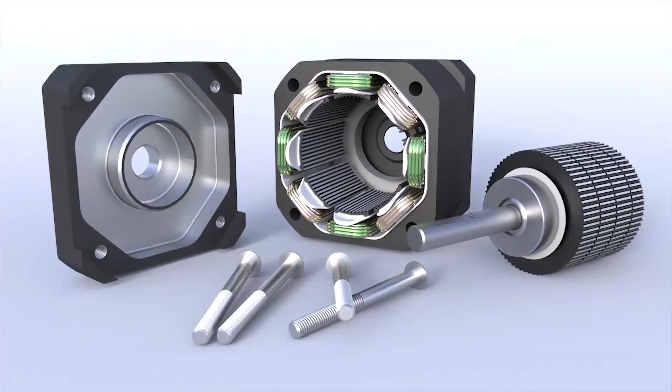The question who actually invented the stepper motor is still open to some debate, partly because original versions were not immediately known as stepper motors. However, for most engineers, ourselves included, it is largely attributed to Frank W. Woods, who patented a motor based on 5 stator coils which could be charged in various combinations to deliver step-by-step movement. There are 3 main types of stepper motors.

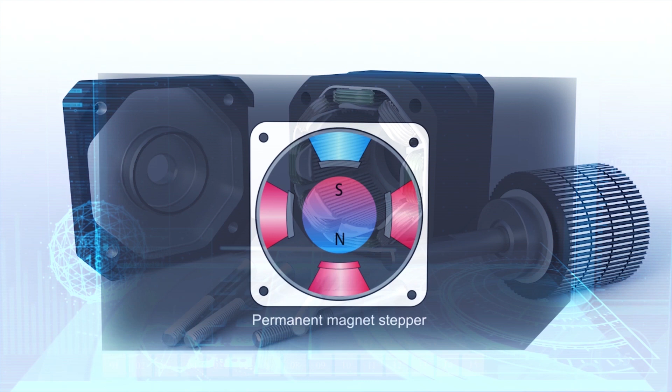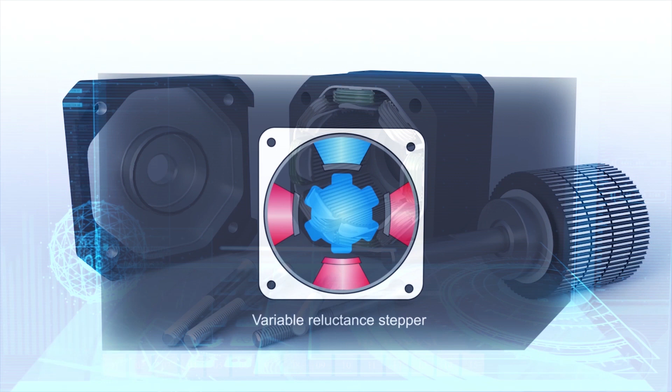Permanent magnet stepper. Permanent magnet motors use a permanent magnet (PM) in the rotor and operate on the attraction or repulsion between the rotor permanent magnet and the stator electromagnets. Variable reluctance stepper. This stepper motor uses a non-magnetized soft iron rotor. The rotor has teeth that are offset from the stator, and as we activate the windings in one particular order, the rotor moves respectively so that it has minimum gap between the stator and the teeth of the rotor.

The third type is the most commonly used, hybrid synchronous stepper motor. It is the combination of the previous 2 steppers. It has a permanent magnet toothed rotor and also has a toothed stator. To show the basic parts of a stepper motor, we will be using the most commonly used model of hybrid synchronous stepper motor. Basic parts of a hybrid step motor are stator, rotor, bearing, and shaft.

Stator has magnetic poles with small teeth. Each pole has a winding. Each winding is connected to the winding of the opposite pole so that both poles are magnetized in the same polarity when current is sent through the pair of windings. Pairs of windings are shown in the same color. Running a current through a given winding magnetizes the opposing pair of poles in the same polarity, i.e. north or south. The opposing pair of poles form one phase.

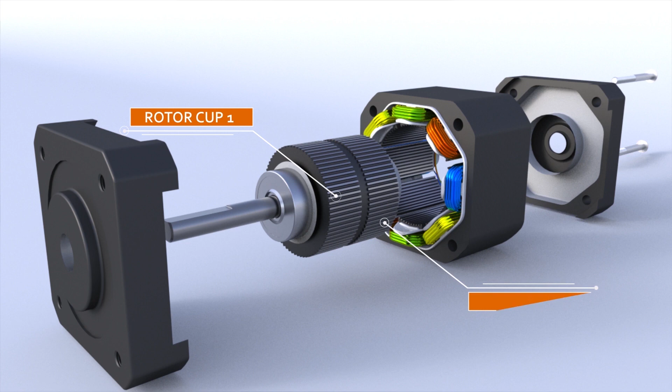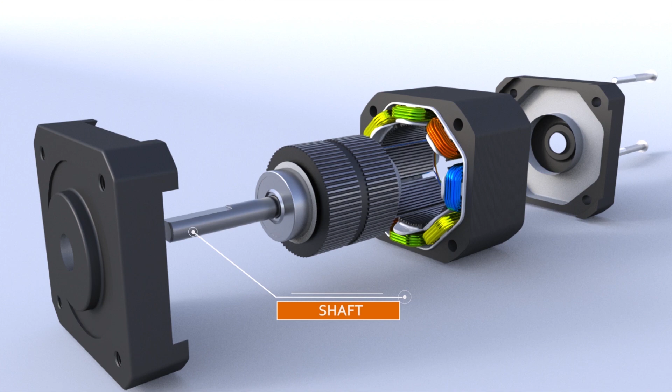Rotor. Rotor is made up of 3 components: rotor cup 1, rotor cup 2, and permanent magnet. The rotor is magnetized in the axial direction so that, for example, if rotor cup 1 is polarized north, rotor cup 2 will be polarized south. Bearing allows the shaft to rotate when rotor is turned. Shaft is attached to rotor and provides rotational drive for the load. Hybrid stepper motors can be made with a single or double shaft.

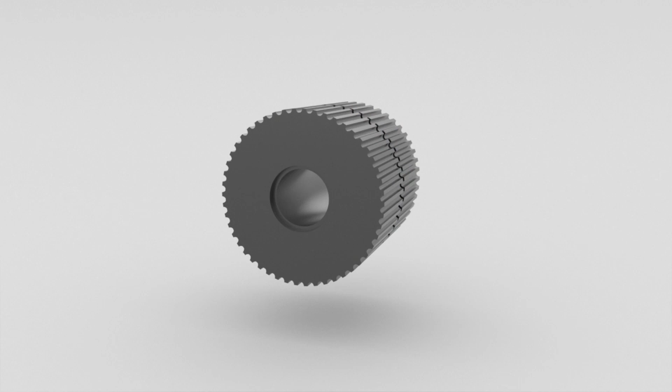Working principle of stepper motor will be explained with a 2-phase hybrid step motor which has 8 poles. With these motors you can achieve very small step angle. Let's learn the working principle and explore the functionality of a typical 1.8 degree step-sized hybrid motor. The hybrid motor has a magnetized rotor with 2 steel caps, so one end of the rotor becomes the north pole and the other end becomes the south pole. The accuracy of this motor lies in the clever arrangement of the rotor and stator teeth. So firstly, let's see and understand it.

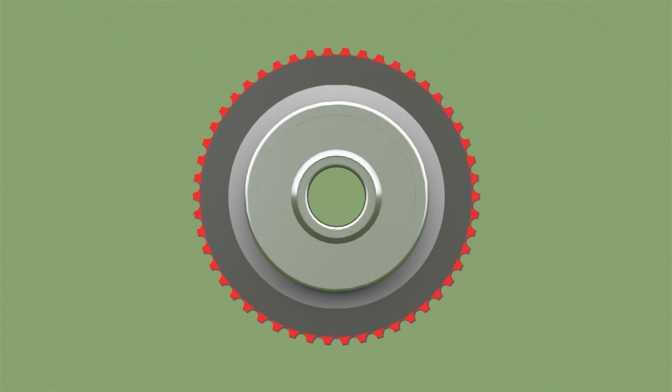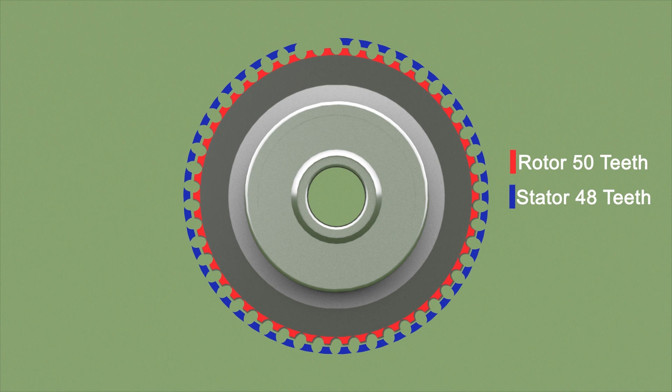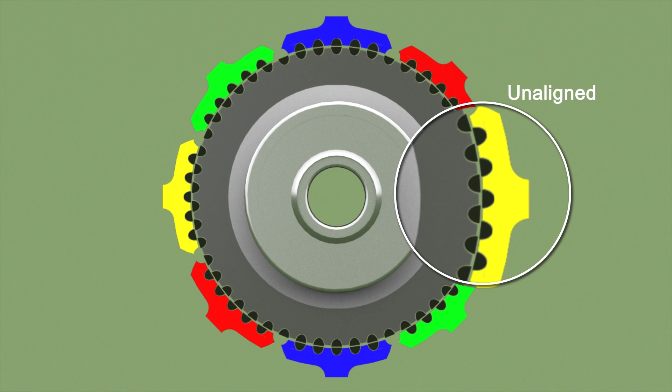Rotor has 50 teeth. To understand the stator teeth arrangement, we must first assume that the stator has 50 teeth as well. But stator actually has 2 fewer teeth than the rotor, so stator has 48 teeth. Now, let's arrange the 48 teeth into 4 group pairs like we showed in the video. Green group of teeth is half aligned with the rotor. Teeth of yellow group are not aligned with the teeth of rotor. Teeth of red group are half aligned with the teeth of the rotor, and blue group are completely aligned with the teeth of the rotor.

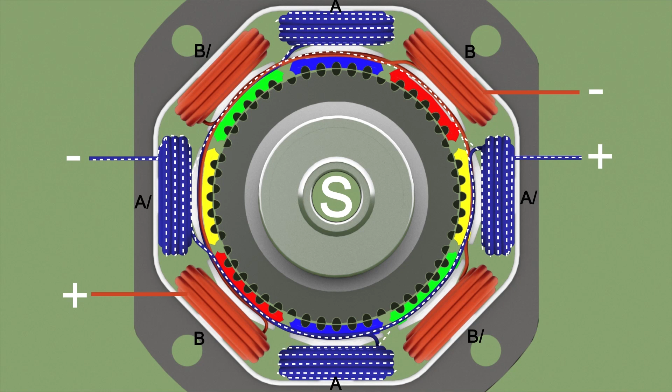Part of the rotor which is facing you acts like the south pole. The stator coils are connected as shown in the video. As we can see, we have 2 independent coil groups. When group A is energized, blue stator windings are magnetized as shown. One pair of stator poles become north pole and the other becomes south pole. We know through history that opposite poles attract, so they will be aligned, and the same polarity poles are not aligned. When coil B is energized, you can see what happens to the rotor.

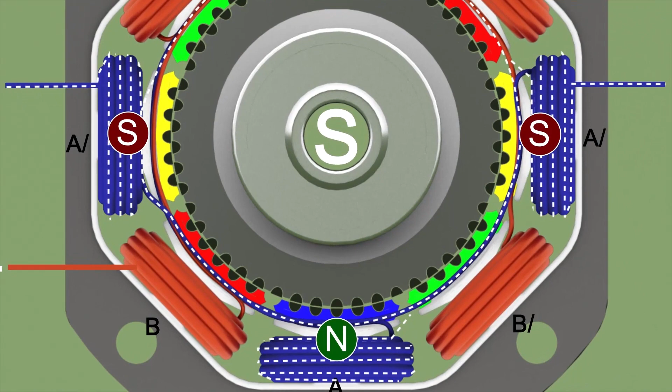The rotor is rotating by a small angle in order to align with the new north pole. It is clear that this angle is 1/4 of the angular pitch, so rotor is rotated by 1.8 degrees. Now we again energize set A with the opposite polarity. Again, the rotor is rotating 1.8 degrees. So when we repeat this process, we can achieve highly accurate motion of the motor.

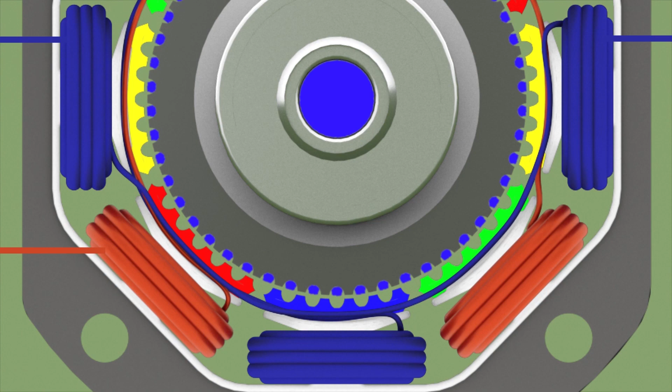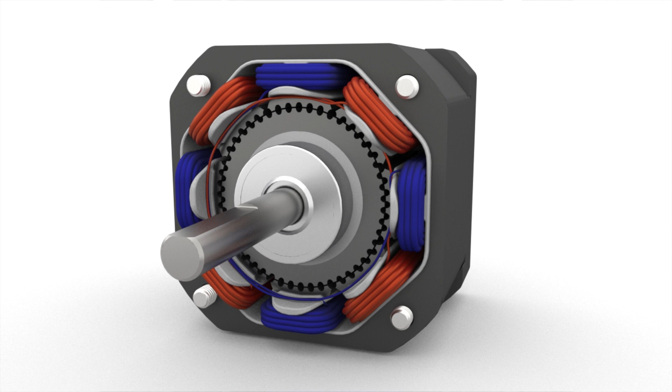Step angle rotation can be improved by half stepping. It is important to know that north rotor cup teeth are placed between the south rotor cup teeth. In this way, alignment of the opposite polarity poles is guaranteed again. So, this is the working principle of hybrid stepper motors. These are ideal for applications when precise movements and simple controls are needed.

Vibration of the step motor is one problem that we must deal with. Vibration can cause problems, especially at low speeds. So, when a stepper motor makes a move from one step to the next, the rotor doesn't immediately stop. Rotor actually passes the final position, then is drawn back, passes the final position in the opposite direction and continues to move back and forth until it finally comes to a rest. We call this ringing, and it occurs at every single step the motor takes.

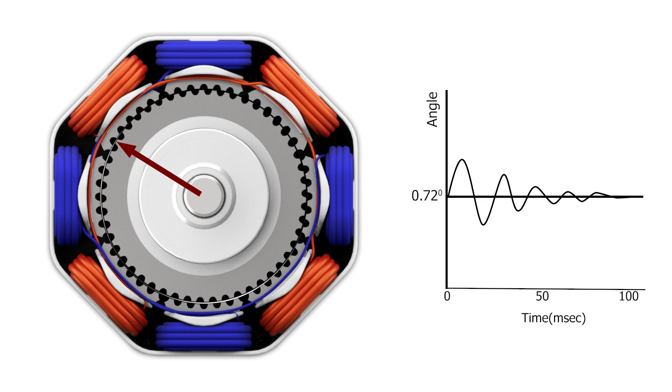Similar to a bungee cord, the momentum carries the rotor past its stop point, then bounces back and forth until finally coming to rest. In most cases, however, the motor is commanded to move to the next step before it comes to a rest. Working principle of variable reluctance stepper and permanent magnet will be shown to see differences and similarities with hybrid step motor.

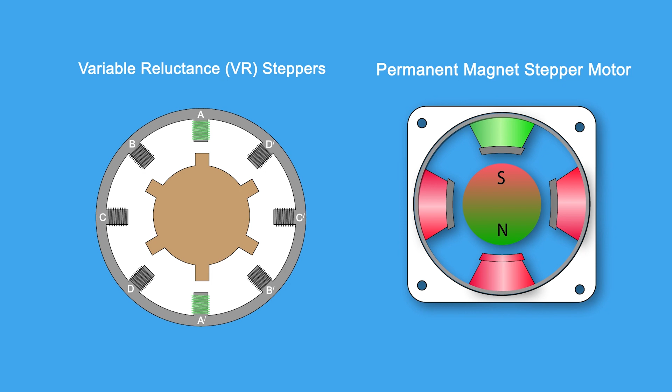Variable reluctance stepper, VR: as illustrated in the video, only one pair of teeth is aligned with the windings at any time. When the controller energizes a second pair of windings, the rotor turns so that a different pair of teeth will be aligned. Because the teeth aren't magnetized, it doesn't matter whether the winding behaves as a north pole or a south pole. The controller has delivered current to the B and B' windings, and the rotor has aligned itself accordingly. Now, the C and C' windings are energized.

The C and C' windings attract the nearest pair of teeth, which moves the rotor 15 degrees clockwise. However, there's a problem. The torque of the VR stepper is so low that it can't turn significant load. For this reason, VR steppers are not commonly found in practical systems. In fact, I've only ever seen a handful of VR motors for sale.

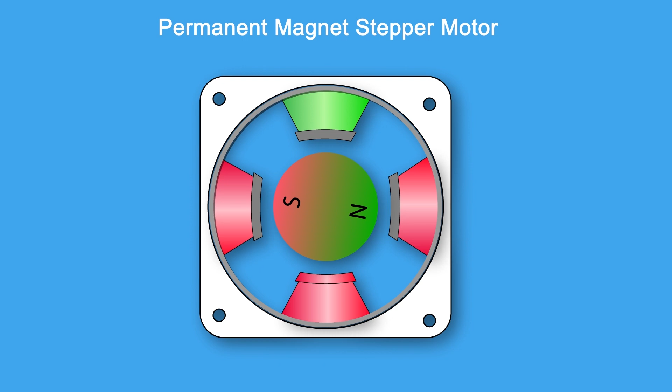Permanent magnet stepper has a permanent magnet rotor, which is driven by the stator windings. Stator windings create opposite polarity poles compared to the pole of the rotor, and the result is the movement of the rotor. A stepper motor is a polyphase AC synchronous motor, and it is ideally driven by sinusoidal current. There are 4 commonly used excitation modes for stepper motors: wave drive, full step, half step, and microstepping. These excitation modes have an effect on both the running properties and the torque that the motor delivers.

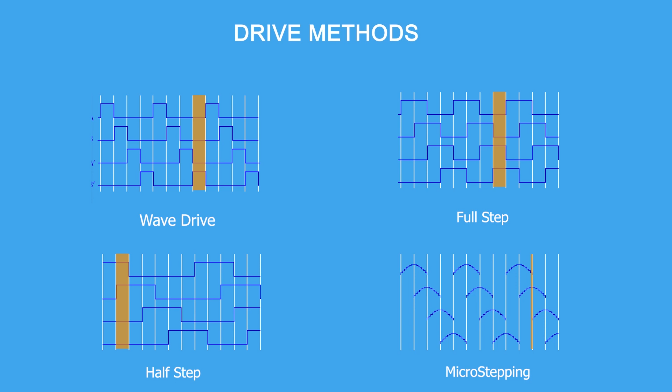The wave drive method has been simplified to better illustrate the theory. In the illustration, each 90-degree turn is representing 1.8 degree of rotor rotation in an actual motor. In the wave drive method, also called the one-phase on method, only one phase is turned on at a time. When we energize the A phase, a south pole, it attracts the north pole of the rotor. We turn off A and turn on B. The rotor rotates 90 degrees, 1.8 degree of rotor rotation in an actual motor, and so on. Each time, only one phase is energized. The wave drive has a 4-step electrical sequence to rotate the motor.

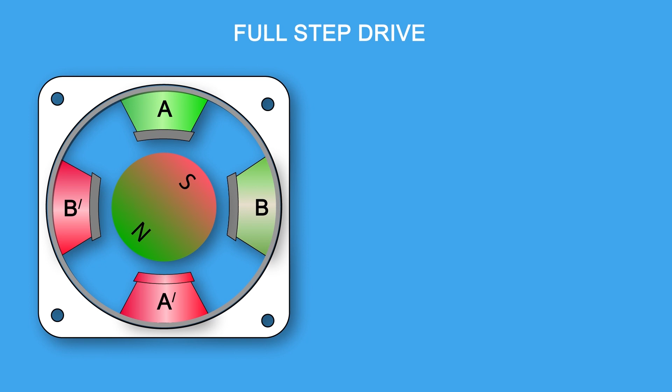Full step drive. Once again, in the illustration below, every 90 degrees represents 1.8 degree rotation in an actual motor. If both phases A and B are energized as south poles, the north pole of the rotor will be equally attracted to both poles and line up directly in the middle. In sequence, as the phases are energized, the rotor will rotate to line up between the 2 energized poles.

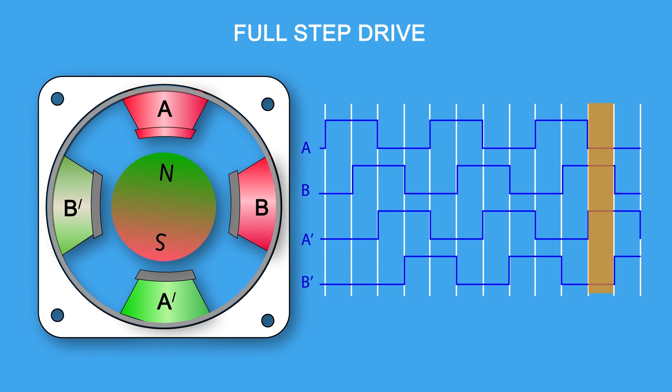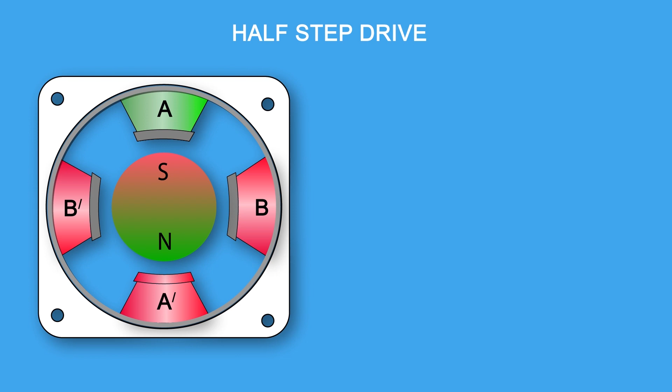Half-step drive. Half-step combines the 2 previous methods. In this case, we energize the A phase. The rotor lines up. At this point, we keep the A phase on and energize the B phase. Now, the rotor is equally attracted to both and lines up in the middle. The rotor has rotated 45 degrees, 0.9 of rotor rotation in an actual motor. Now we turn off phase A but leave on phase B. The motor makes another step, and so on and so forth. By alternating between one phase and two phases on, we have cut the step angle in half. Remember that with a smaller step angle, the vibration is reduced.

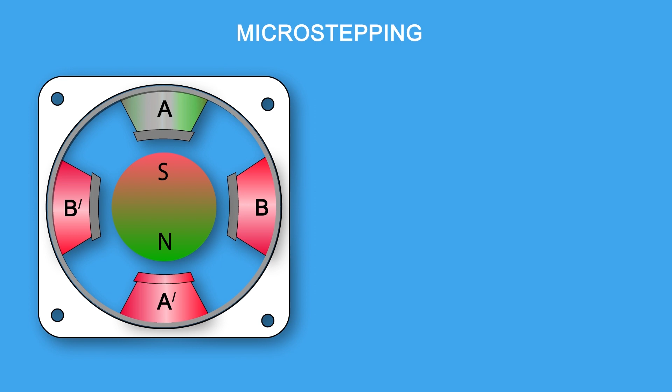Microstepping. Microstepping is a way to make small steps even smaller. The smaller the step, the higher the resolution and the better the vibration characteristics. In microstepping, a phase is not fully on or fully off, it's partially on. Sine waves are applied to both phase A and phase B, 90 degrees apart, 72 in a 5-phase stepper motor. When the maximum power is in phase A, phase B is at 0. The rotor will line up with phase A. As the current to phase A decreases, it is increasing to phase B. The rotor will take tiny steps towards phase B until phase B is at its max and phase A is at 0. The process continues around the other phases and we now have microstepping.

There are some problems associated with microstepping, mostly accuracy and torque. Because the phases are only partially energized, the motor torque is reduced, usually by about 30%. Also, because the torque differential between steps is so small, the motor sometimes cannot overcome the load. In those cases, the motor may be commanded to move 10 steps before it actually starts to move.

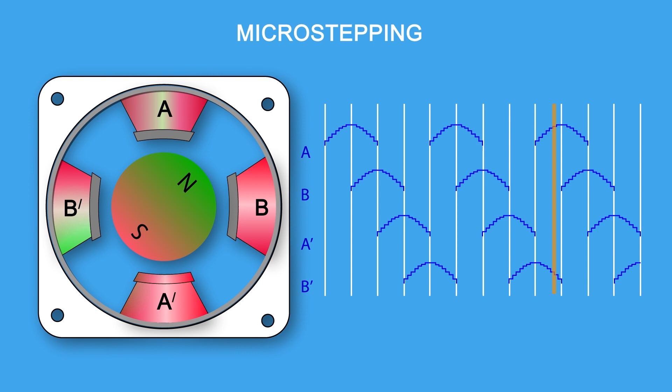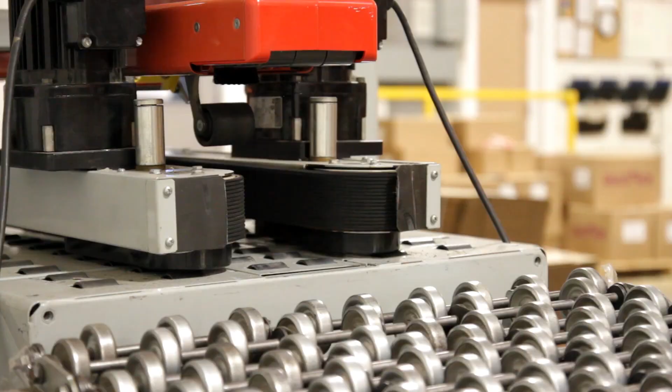Computer-controlled stepper motors are a type of motion control positioning system. They are typically digitally controlled as part of an open-loop system for use in holding or positioning applications. In the field of lasers and optics, they are frequently used in precision positioning equipment such as linear actuators, linear stages, rotational stages, goniometers, and mirror mounts. Other uses are in packaging machinery and positioning of valve pilot stages for fluid control systems.